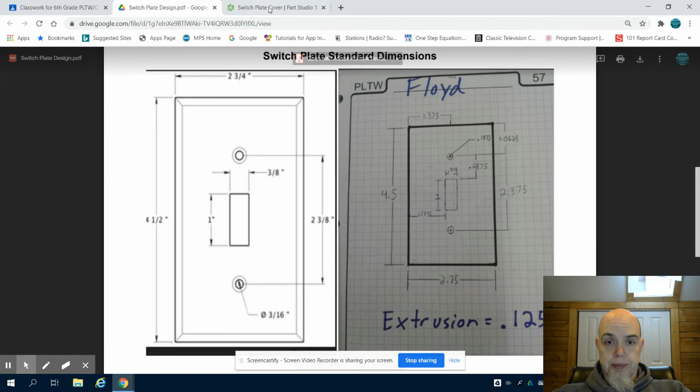This is the grade 6 video for the switch plate cover design. In this video, we're going to show you how to create a blank switch plate, realizing that your design may be different. This is just to show you how to design this standard light switch plate cover that you would see on any wall. The first thing we're going to look at in our drawing is our switch plate cover is 4.5 inches by 2.75 inches.

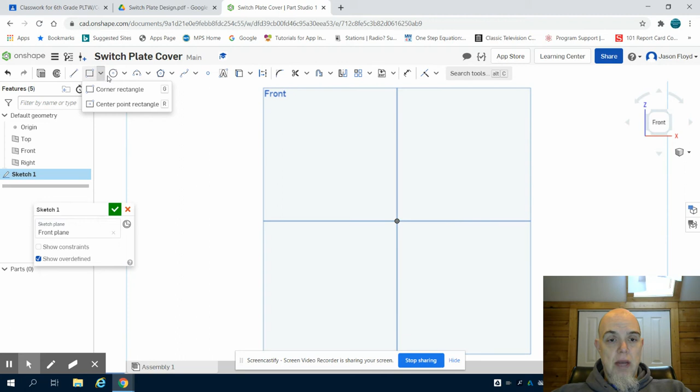So going to OnShape, I'm going to create a sketch. I'm going to create this on my front plane. I'm going to orientate myself. I'm going to come up to my rectangle tool. I'm going to choose a center point rectangle so I can choose the origin point. And again, I'm going to make that rectangle 4.5 inches by 2.75 inches.

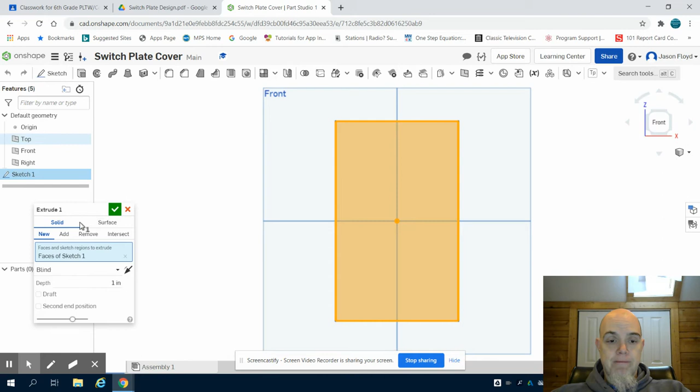The next thing that you're going to notice is that it is extruded for a standard light switch plate cover, 0.125 inches. As I go out and gain perspective, I can see my light switch plate cover. The next thing I have to do is I have to put my holes in. I'm going to start again from the center of this, and I'm going to do the light switch hole, which I can see is 1 inch by 0.375.

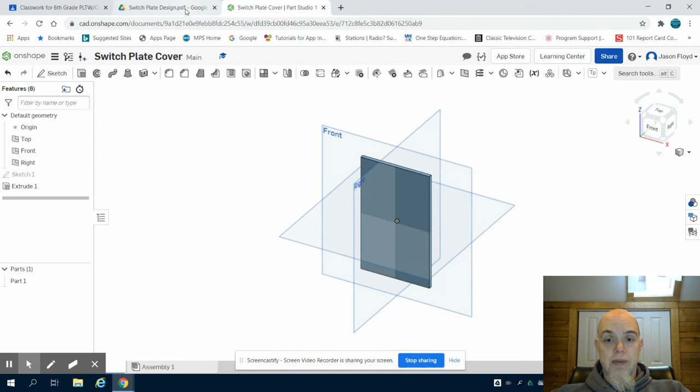Now I know that this is centered, and I created mine at the center point. So I'm going to choose my sketch again. I'm going to place it on the front of my light switch plate cover, not the plane itself. I'm going to go back to my center rectangle tool. I'm going to drag out and make it 0.375 inches by 1 inch.

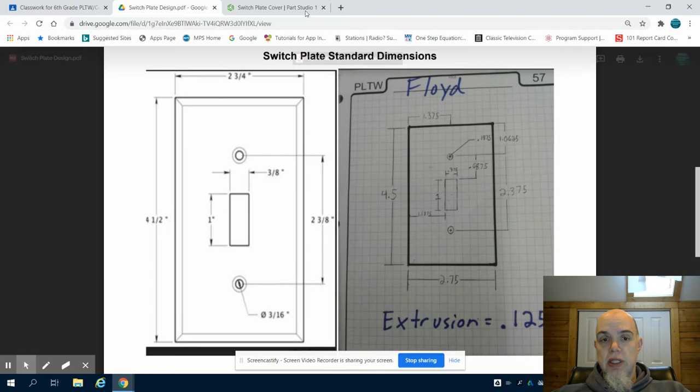Now, I could have used my corner rectangle tool, but if I did that, I would have to dimension this from the side at 1.1875 and down from the top, I believe that'd be 1.75. So I would have to dimension this rectangle. By choosing the center point rectangle and the origin axis, I can make sure everything is centered without having to dimension it. The next thing we're going to notice is I have a series of holes that I need to put on. So I can do all of this in one sketch.

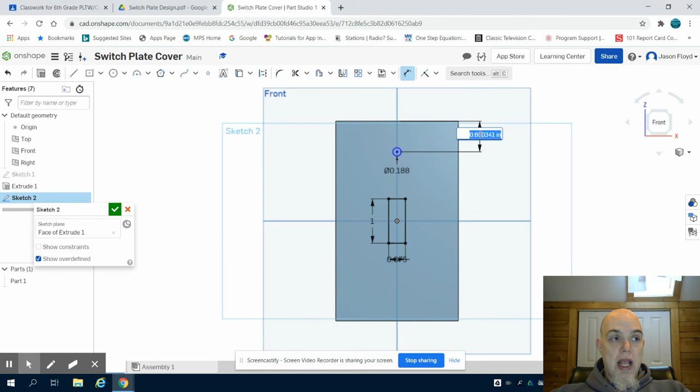So I'm going to grab my circle tool. I'm going to be on that center axis I can see there, so I know I'm centered in that plane. And I'm going to make the first one 0.1875. So that is the size of the actual screw hole. Now looking at my drawing, I'm going to dimension the center point of this to the center point of the top, and that needs to be 1.0625.

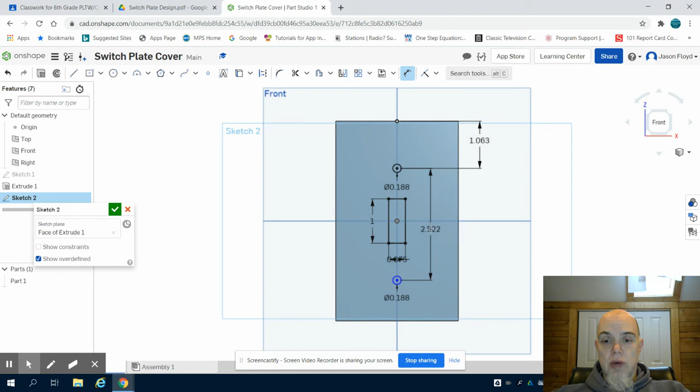So what I can do now is I can grab my second circle. I can again make sure that's lined up with my center point. I'm going to type in 0.1875. You'll notice that it rounds it up to 0.188. The next thing I'm going to do is I'm going to dimension from my center point to my center point, dragging out, and looking at my document, I can see that my holes are 2.375 inches apart. So I'm going to type in 2.375. And now I have a switch plate that will fit any standard light switch outlet in terms of my dimensions. But the problem is I don't have holes yet.

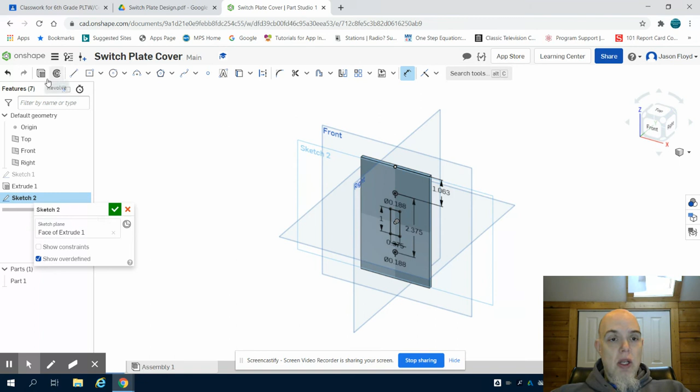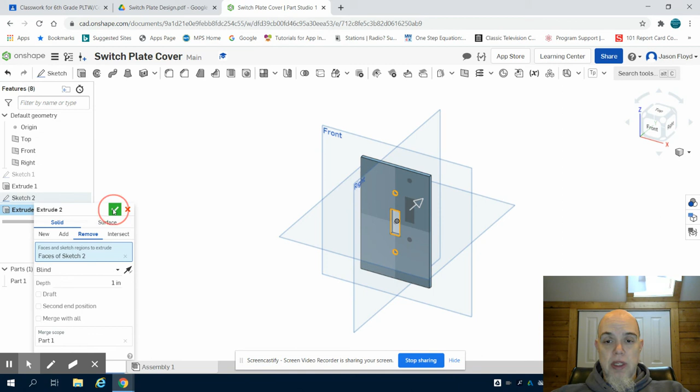So I'm going to click on my extrude button. You're going to notice those three faces of those sketches were selected. Instead of adding, I want to come here and click on remove, which will switch the direction, and it will also cut the material instead of adding to it. I'm going to hit my green check mark, and now I have a standard light switch plate cover.

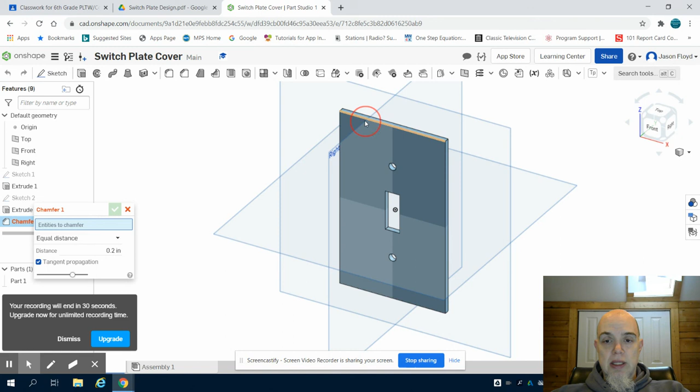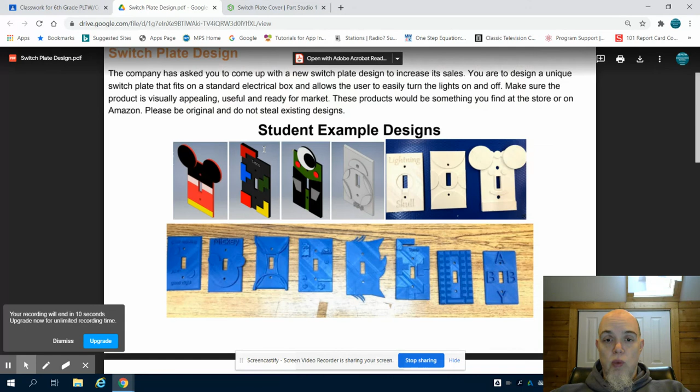Now, what we can notice in our drawing here is standard light switch plate covers are chamfered, which means we have a decorative cut edge put on them. I can come up here to my chamfer button. I can select my outer edges. And right now I have a 0.2 inch chamfer, and we'll stick with that. And it gives me that nice decorative look. This again is for a standard light switch plate cover. You are going to create your customized light switch plate cover that matches your design.